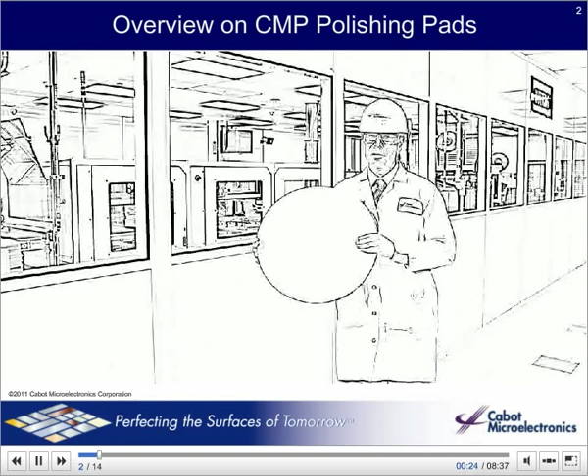Hello everyone, my name is Professor Polish, and in this section I'll be giving you an overview on CMP polishing pads. I will tell you a little bit more about their composition, how they are made at Cabot Microelectronics, and their importance in the CMP process.

Pads are the next big part of CMP. They are usually made of a hard polyurethane foam, are cut into discs, and laminated onto a subpad. Pads have circular or crisscross grooves on the surface. Sometimes pads come with windows that allow sensors to monitor the polishing process.

The pads attach face up to the rotating platen on the CMP tool and spin at around 100 RPM. Slurry is poured onto the rotating pad surface. The spinning wafer is pressed down onto the pad that has been saturated with slurry. The pad causes the rolling, sliding, and bouncing of the nanoparticles that slowly wears away the wafer surface.

Chemicals fine-tune the process. Pads are quite expensive, often several $100s each, so customers want them to last a long time, hundreds or even thousands of wafer passes lasting hours or even days before they need to be replaced. Why don't they last forever? To understand this better, we need to look in more detail at their structure and how they are made and used.

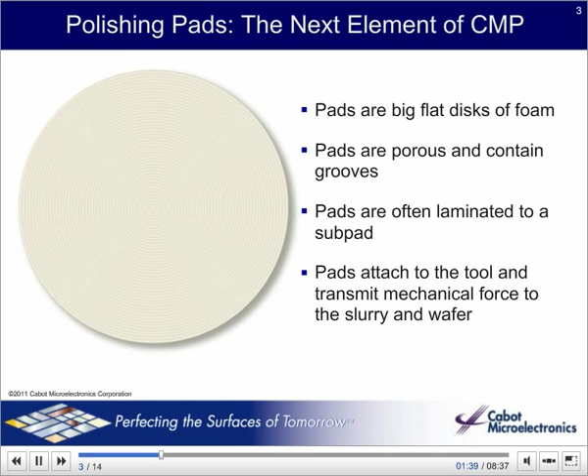Pads generally come with grooves and pores, as you can see in these micrographs. Our understanding of pad mechanics is not complete, but we do know that grooves are important, mostly for transporting slurry into the process and polishing byproducts away from the process. Pores also play a critical role in holding slurry close to the wafer.

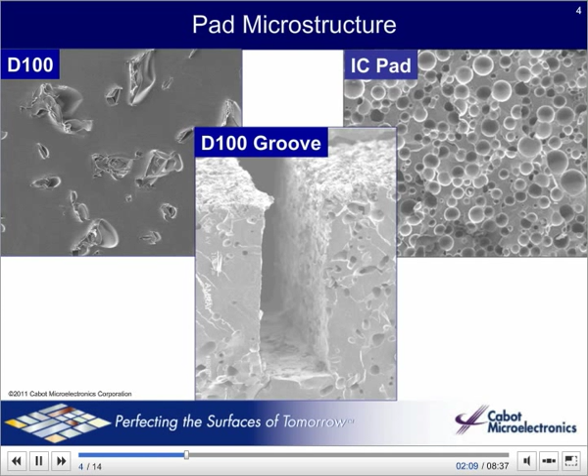We deliberately pop the bubbles on the surface of the pad using a disc of sharp diamonds called a conditioner. When the pores are scored with the diamond conditioner disc, a number of them pop open, and the tongue-like flaps that form are called asperities. These stick out from the surface of the pad and are what makes direct contact with the wafer during the polishing process. Usually only about 0.1% of the area of the pad actually touches the wafer.

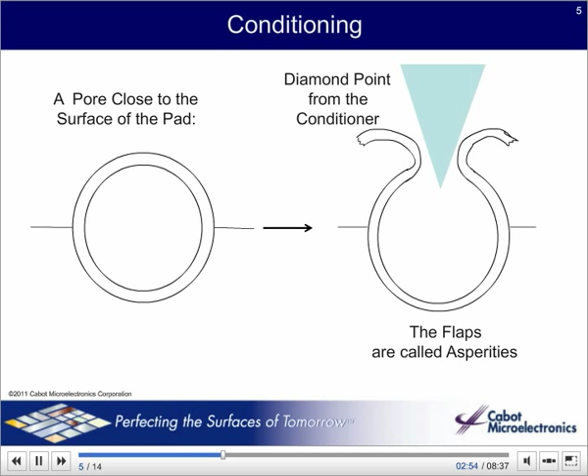You can see why the size and shape and hardness of the pores are so important, because this is where the rubber meets the road. After polishing for a while, the asperities soften, maybe melt, get caked with debris, lose their resiliency, and need to be replaced. The diamond conditioner continuously or intermittently shears away the pad surface and creates new, fresh asperities.

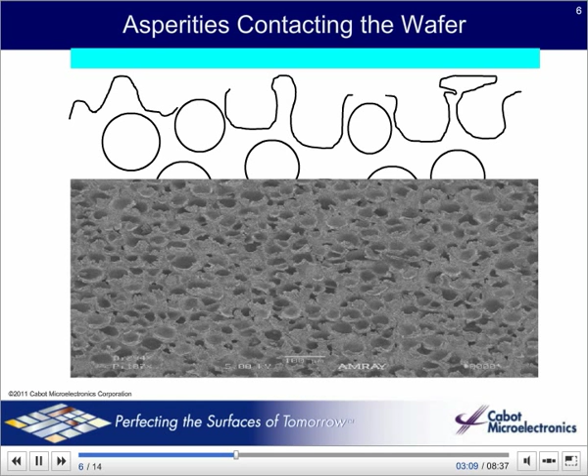This drawing was adopted from Len Borucki's work at Araca, showing how different asperities might contact the wafer. The picture below is from Abhi Prasad, showing what the asperities look like under high magnification. As I mentioned, the asperities are really what contact the wafer. They represent about 0.1% of the total wafer area.

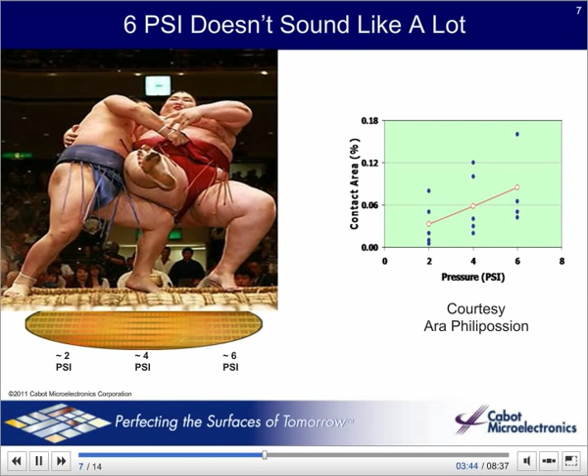So if a process runs at, say, 2 or 4 or 6 pounds per square inch, that might not seem like much. But if only 0.1% of the pad is making contact, this is really a force of 6000 pounds per square inch. Imagine one 300-pound sumo wrestler lifting a second sumo wrestler over his head and standing on one toe. That's heavy. No wonder we get some scratches from time to time.

As I mentioned on the last slide, we can also independently control the pore size, in this case ranging from 2 microns to 130 microns. To put these sizes in perspective, a 130 micron pore is 1,000 times bigger than a 130 nanometer feature on a chip.

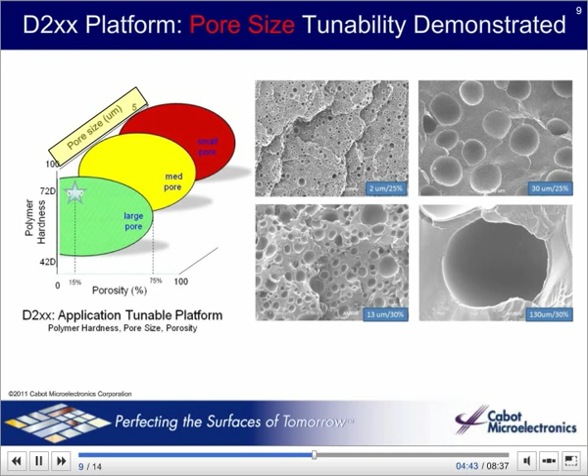So you can think of these asperities as huge tongues of rubber sliding along the wafer surface. Since particles are also around 100 nanometers or less, you can envision hundreds or thousands of particles adsorbed onto a single pad asperity. It is probably unlikely that the bare rubber contacts the wafer surface. More likely there are particles and fluid riding and rolling in the gap.

CMC has 2 unique approaches to make pads. In the D100 process, we dissolve the rubber resin into carbon dioxide at high temperature and pressure, at a point where the CO2 is supercritical. Not quite a gas, but not quite a liquid either.

Then we extrude the supercritical mass through rollers, and as the sheet enters the atmosphere, it cools, quenches, and depressurizes. The rubber hardens and the CO2 turns into a gas at the same time, leaving it very uniformly porous on the inside. The second process that we employ for D200 is to take a roll of crystal clear rubber already extruded to about the right thickness.

We then place the roll in a chamber containing carbon dioxide and pressurize it for several hours to saturate the rubber with CO2. The molecules in rubber are long and flexible enough to take up a lot of CO2. Then we quickly drop the pressure and flash heat the entire roll, and the dissolved CO2 causes the rubber to suddenly foam like popcorn does in a microwave. By controlling the pressures and temperatures and times, we can fine-tune the pore size and concentration. Pretty clever.

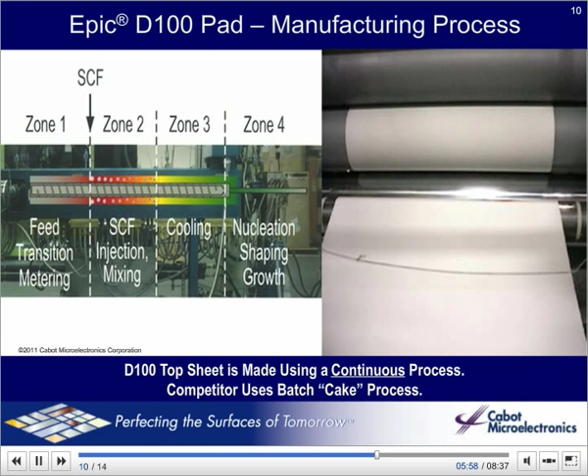Another big difference between Cabot Microelectronics rubber and the rest: we use something called thermoplastic rubber, and all the other guys use thermoset rubber. In thermoplastic, the rubber is made up of long polymer molecules that basically tangle up, and this is reversible. If you heat it, it flows, and if you cool it, it is stable. With thermosets, however, they cure the rubber permanently using chemical bonds. Once you've cured a thermoset, it is permanent.

Can anyone guess why this difference can be important? Here are a couple reasons. During the polishing process, the interface between the wafer and the pad heats up, sometimes a lot, from room temperature all the way up to 60, 70, or 80 degrees centigrade. Our thermoplastic softens, which can be great for reducing scratches, but it also makes our rubber more difficult to condition.

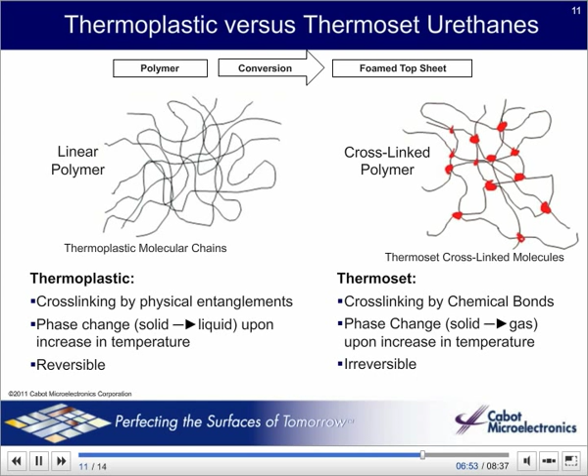We can also tune the hardness or modulus of the rubber. In general, the harder the rubber, the more likely we are to see scratch defects. But hardness also improves the removal rate and uniformity, so we have to make trade-offs to optimize the process. For buffing processes where extremely good final surfaces and low scratch are critical, but removal rate is not too high, then the soft 42 durometer rubber works well. For higher removal rates, for example during the first step bulk removal of copper or oxide, a harder pad is usually best.

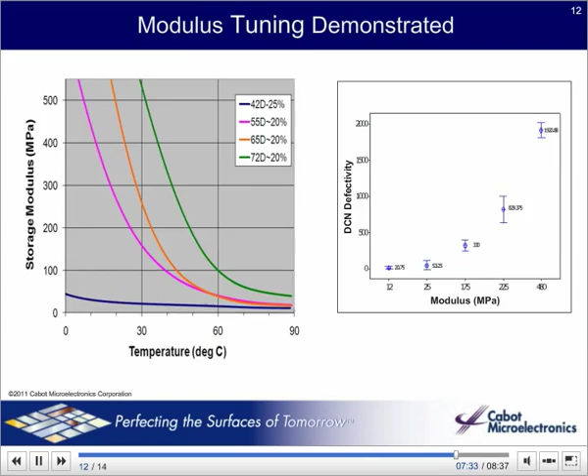So, where are we in our learning? We understand how CMP fits into the semiconductor manufacturing process, and that it uses a tool, a wafer, a slurry, and a pad. We learned in the previous section the different components in slurry, and now we learn that pads are also complex, with pores and asperities that control the mechanics of polishing. We learned that our process uniquely allows us to tune the hardness, the porosity, and the pore size, and that Cabot Microelectronics uses a thermoplastic, unlike the rest of the pad designers. Now, let's look at some of the things that can go wrong with polishing.